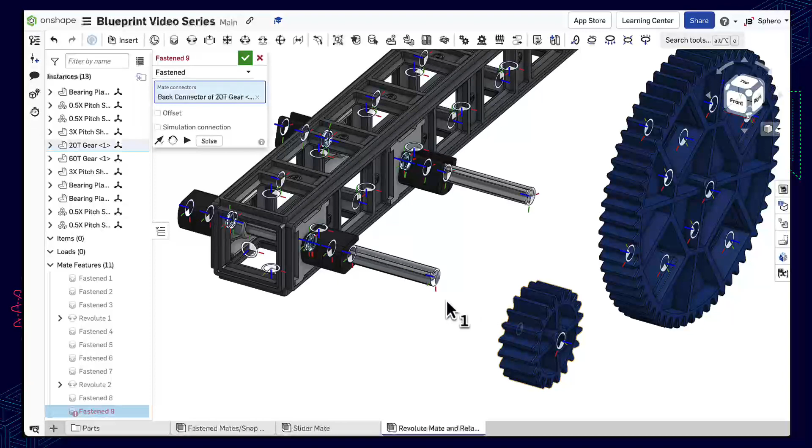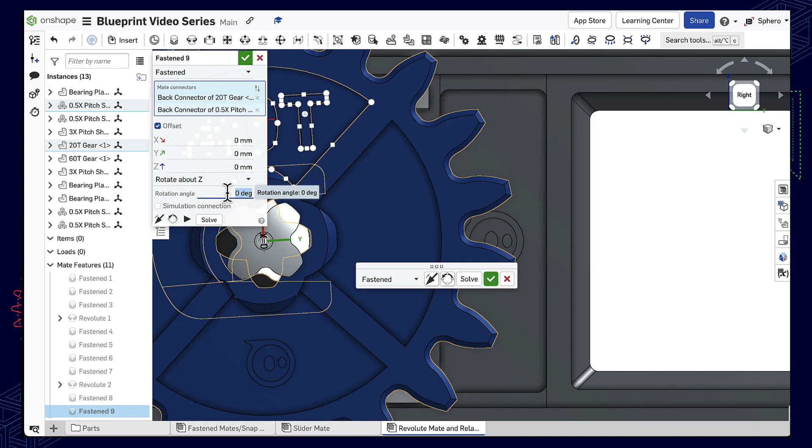Now I'm going to use the fasten mate to attach my gears to the shaft and shaft collar. When I apply the fasten mate, you'll notice that the shaft spline does not line up with the gear. So what we need to do is use an offset to rotate around the Z-axis by 45 degrees. This will align the gear and the spline together.

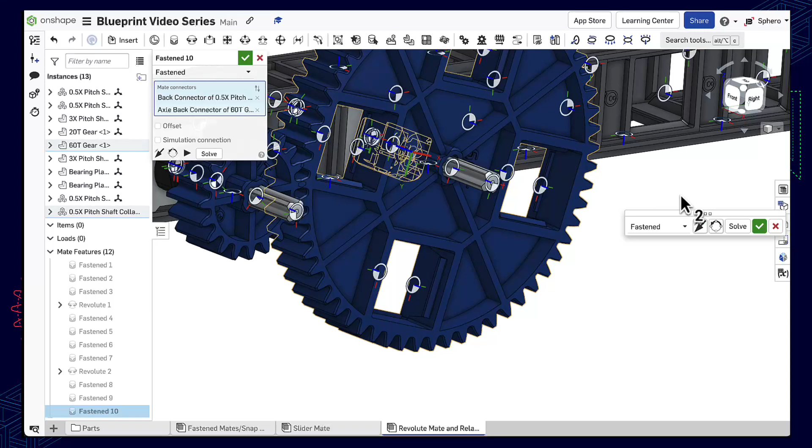Now we can repeat the process for the second gear. Select the fasten mate, select the two appropriate mate connectors for the gear, and then double check to make sure that the spline of the shaft and the gear align. In this case, they also need to be rotated 45 degrees to make those align.

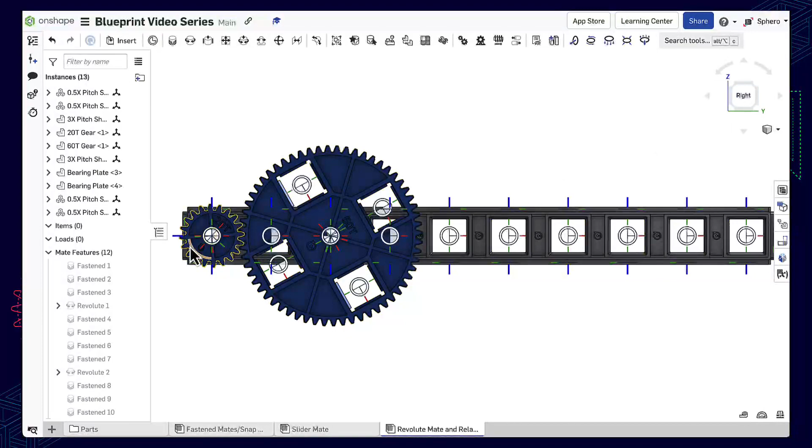So now our gears are in here. Notice they rotate independently, they don't move with each other at this point. We can also add relations between components.

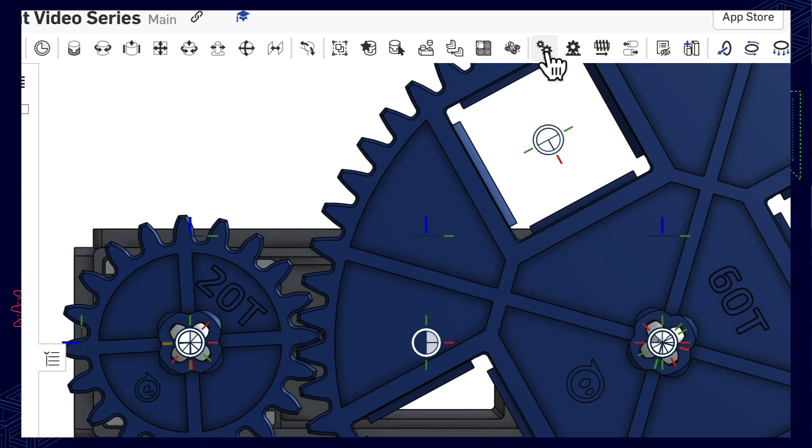In this case, since we're dealing with two gears, we are going to add a gear relation. I'm going to activate the gear relation tool and select the two revolute mates, so I'm going to choose revolute mate 1 and revolute mate 2 to apply these. And then I need to calculate my gear ratio.

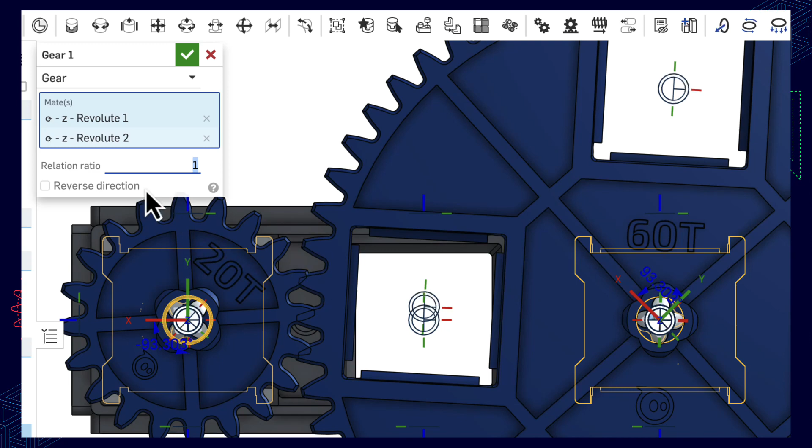In this case, we have a 20-tooth gear and a 60-tooth gear, so our relation here is 1 to 3. We enter gear relation ratios in Onshape as a decimal, so 1/3 is 0.333 repeating. So enter a bunch of threes to get that sufficiently accurate.

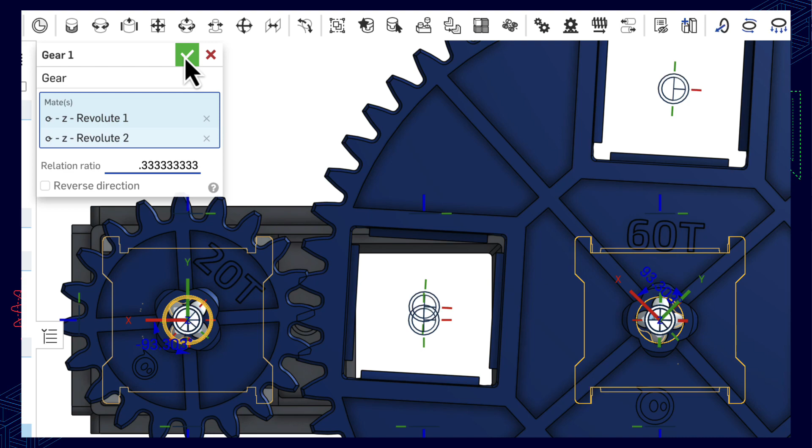Now, as you rotate those gears, you can go and double check to make sure those teeth mesh. If the teeth do not mesh properly, as in this example, we need to adjust the angle of the mate connector so that we can get those teeth to line up.

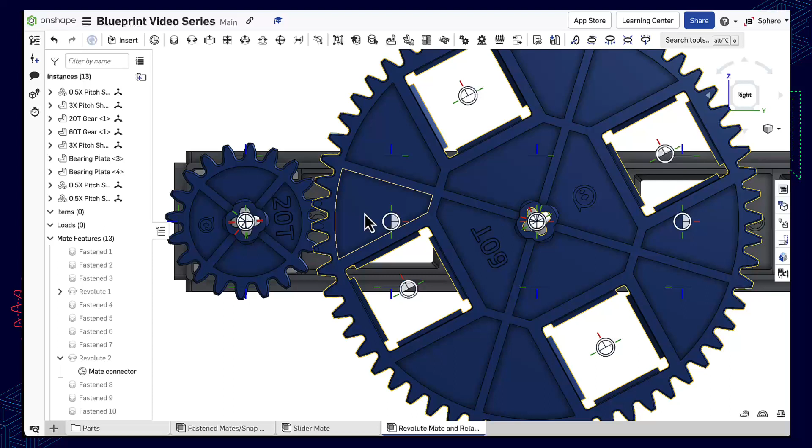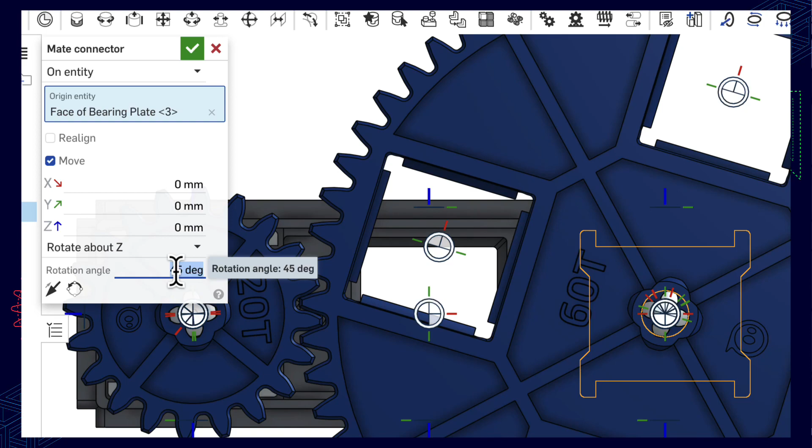In this example, I'm going to use the mate connector on the Revolute 2 mate. So I just hit the little dropdown there and double click on the mate connector that's underneath Revolute 2. I can select the move checkbox, make sure I'm rotating about Z, and enter that 45-degree angle again and apply it. Now the teeth on my two gears will mesh perfectly as we rotate each of those gears.

Learn how the cylindrical mate and screws interact in the cylindrical mate and screw relations video.